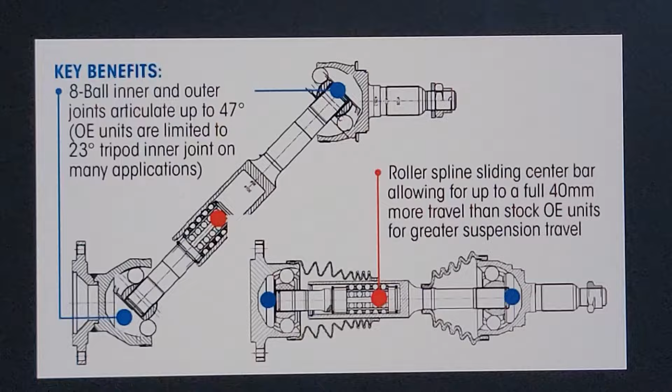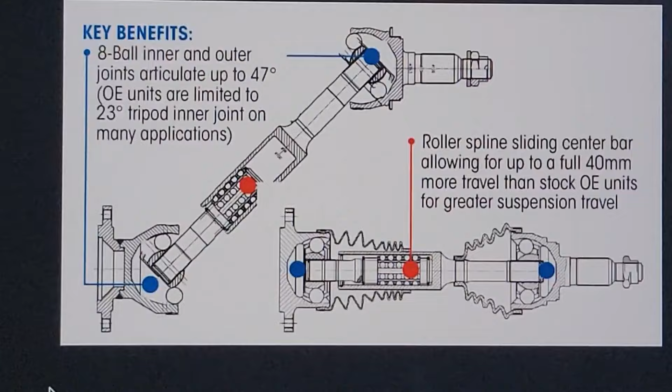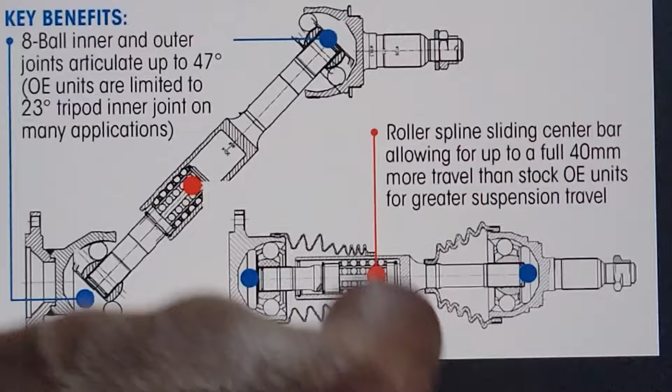Okay, what you're looking at here are the TrakMotive extendable extreme angle CV axles designed for vehicles that are 4x4, go off-road, that people have done a lift to, so they can handle this sort of crazy angle. The way it works is there's a piston inside the axle, so this axle shaft is much larger in diameter compared to factory CV axles in the Astro van. At the top, it's not like that 3-lobe thing we have, which could actually pull out. This is a totally different system, designed to run smoothly with this extreme angle.

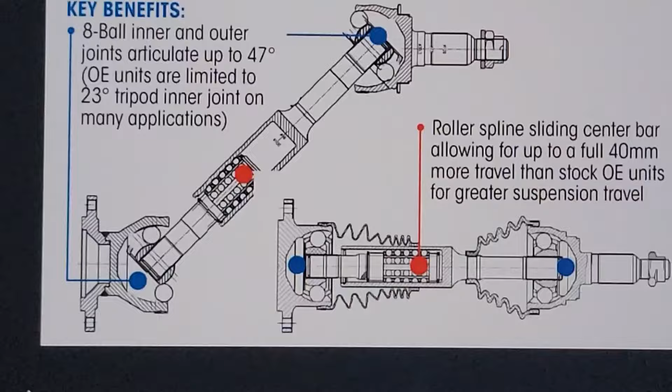Now, what you're about to watch here isn't the best video. I was hoping I'd turn the camera on pulling into the driveway, get out of the truck, walk up, say hi to the guys, and they'd take me in, show offices and examples and schematics and all the stuff, and maybe a factory. None of that, as you'll see.

Google Maps kept taking me to the wrong place. I drove around there for like 20 minutes going to all these different businesses, and none of them had heard of TrakMotive. When I finally found the place, it didn't even say TrakMotive on the door. I went to walk away and the guy opened the door. He's like, Mike. I'm like, yeah, because this is us.

So didn't want to be on camera and all that. Their bosses weren't in, and they're gearing up to go to SEMA, packing all their displays up and everything, so there was really nothing to show. But what they had me do was just basically cut my wheels in both directions. They went underneath and looked, and it looks to them like there's plenty of room to do this.

He says they usually get, this is Ed I'm talking about, great dude, and he said usually they get a front clip and build it on, put it together on there and double check everything. But he thinks it'll work. So I don't know if that means they'll still try to find a front clip and do all that work. He's got to okay it with the boss, and then they should go for it.

So he said it could be up to 4 months before they can make me a set. He said they'd send me a set. He said it could be 6 to 8 months before, if they decide to make them for you, at least before they're available in the brick and mortar joints, what they'd call their vendors. Places like, well I already mentioned, I'm going to mention that in the video here, you'll hear about that, but you know, like O'Reilly's, places like that, wherever you can buy their heavy-duty, extreme angle, extendable CV axles. The reviews I've seen are pretty good on them.

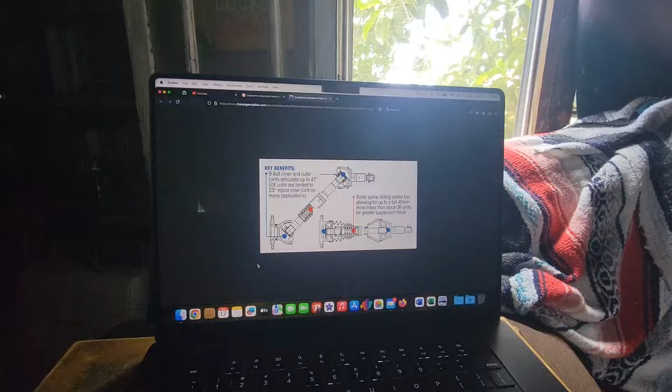I just drove out here to Redlands looking for TrakMotive, and Google Maps has taken me to 2 places that are not it. There's no big sign out there that says TrakMotive, and I've gone to 4 different places. Nobody's heard of it.

I tried calling, but I didn't bring the guy's number with me, Ed. Sorry, but I got one last building here to try out. We'll see if this is it.

This is very bizarre, very very bizarre. If this ain't it, man, I'm driving home and this whole drive was for nothing. But there's some 4x4 vehicles out here, so this looks promising.

Let's park this thing and walk in and see what happens. I parked right next to a bush, I can't even open the door. This is the kind of day it has been. Let's turn this thing around.

Oh my God, I hope he's been watching me this whole time, laughing and trying to decide this guy's an idiot. It's not worth it to us to make these axles even if they do fit, because he clearly can't find his way around. What's the old thing I say all the time? A Marine is never lost, he's just temporarily disoriented. That's where we're at right now. What a friggin' nightmare.